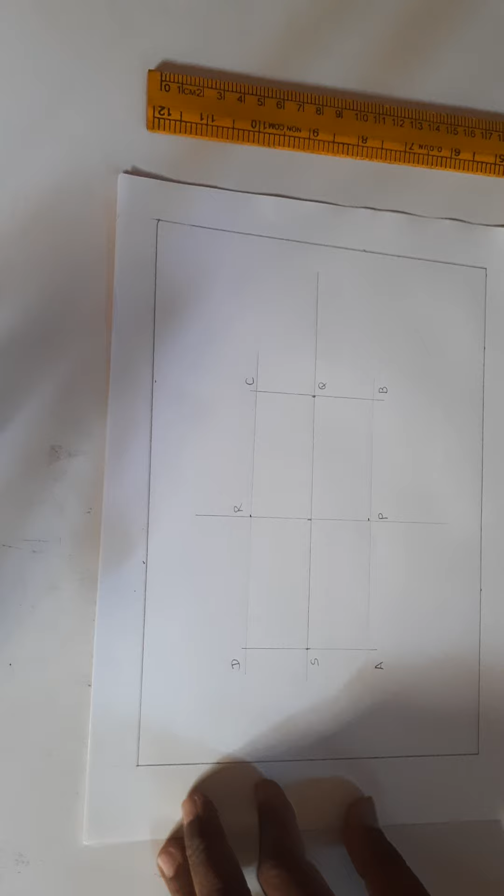Okay, girls. Now we are making this rectangle as ABCD. So I am marking this as A, B, C, and D. The midpoints as P, Q, R, S. Fine, girls.

Now mark on DS at 1 centimeter apart, because we are dividing into 3 equal parts. Similarly AS also 3 parts. This center one I will take as O. Similarly CQ also we are dividing at 1 centimeter apart, and QB also 1 centimeter apart.

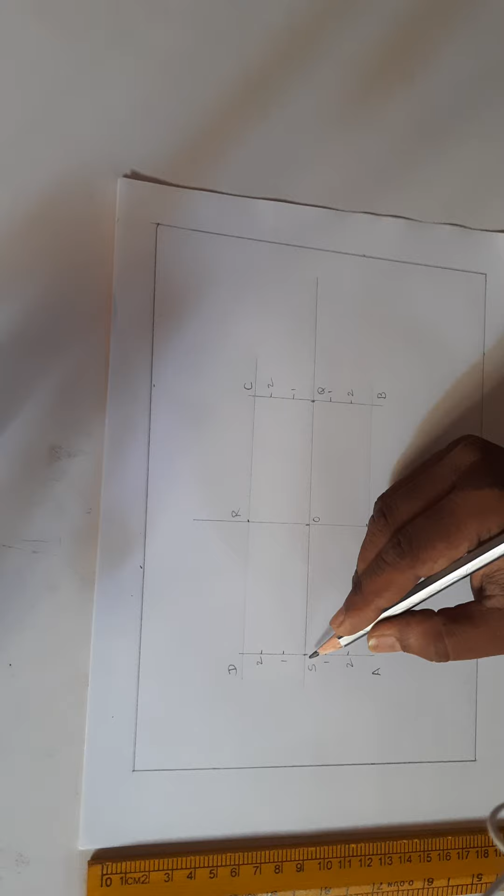Now always from the center we have to number as 1, 2, 3. So from here I am marking 1, 2, and here also 1, 2. From the center we are going outward. Similarly from S we have to mark SO as 3 equal parts. It is 6 centimeters, so we mark 2 centimeters apart.

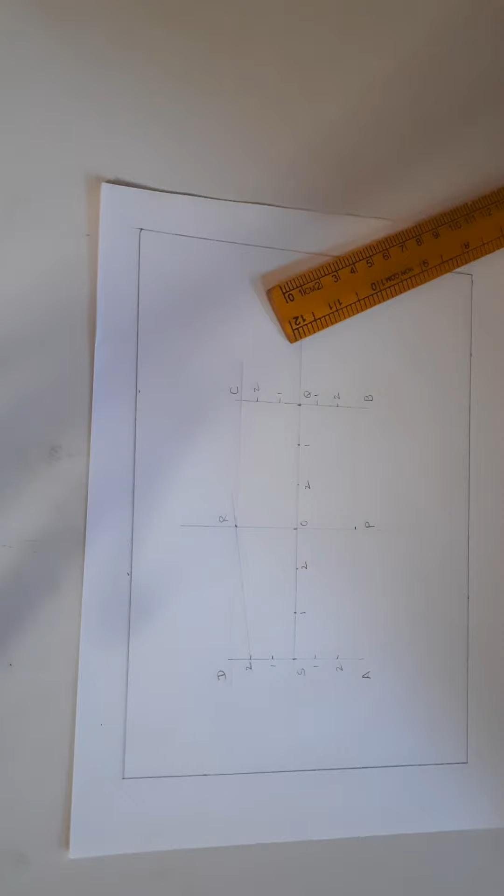So the first quadrant we are taking, draw a thin line passing through 1 and R. Similarly 2 R also we are making a line. So the left quadrant we are making. Now from P you have to join 2 and extend it till it intersects the R2 line, up to here.

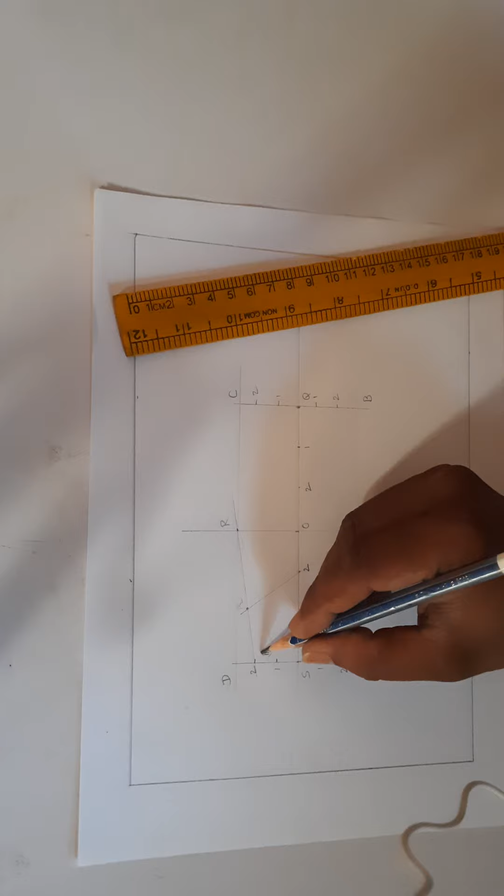Mark this as point P2. Similarly join P1 and extend it till it intersects the R1 line. So mark it as P1 and this as P2.

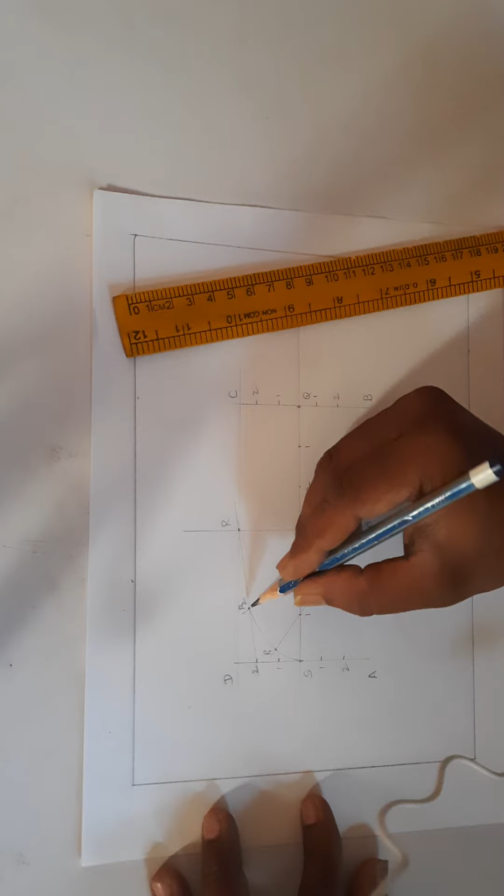Now we have to draw the first quadrant arc from S passing through P1, P2 and R. Join with a thin free hand line. Now P2 to R; it is a lengthy line, so take care that it comes like a tangent towards R. First draw thin with H pencil, then highlight with HB pencil. This is the first quadrant of the ellipse.

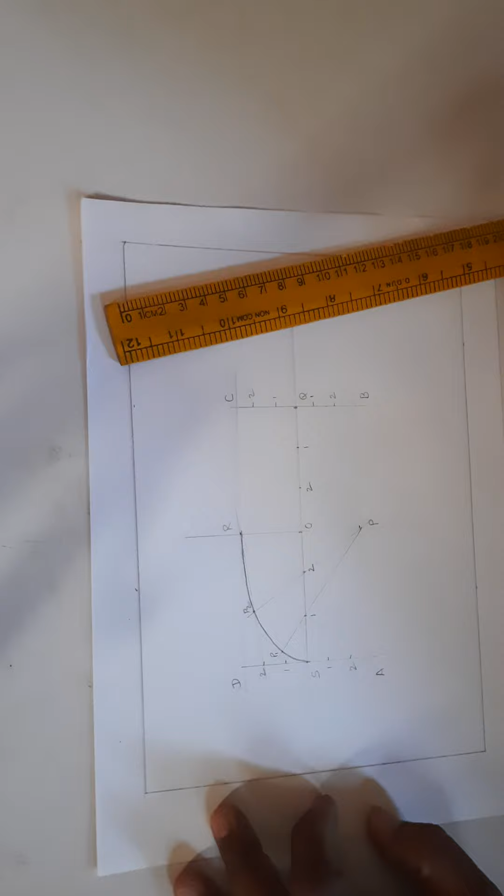Now the same pattern we have to draw on the right side. So we join R and 1 with a line, and R2 we are drawing a line.

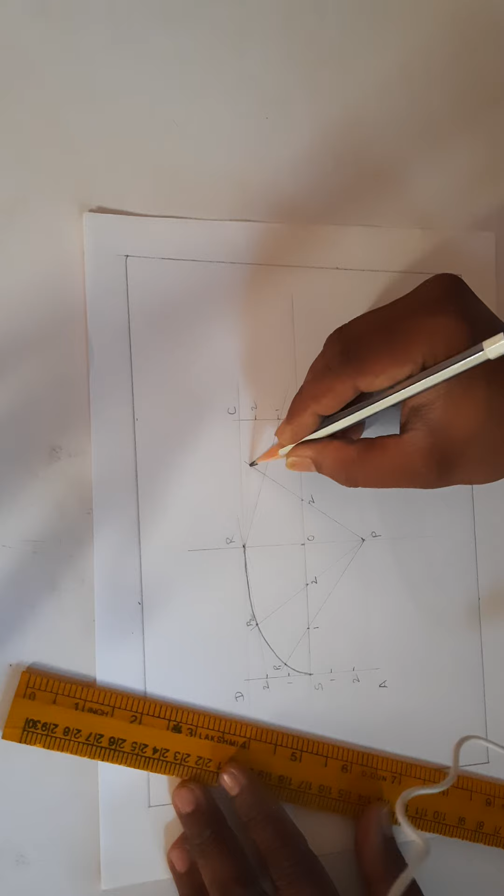Now the same pattern: from P we have to draw the line P2 and extend it till it is intersecting the R2 line on the right side. So P and 2, we are drawing a line and extending it till it is intersecting this R2; now mark this as P3. Now from P1, extend till it is intersecting R1 itself. So again we have to draw the line. So now P3, and this will become P4.

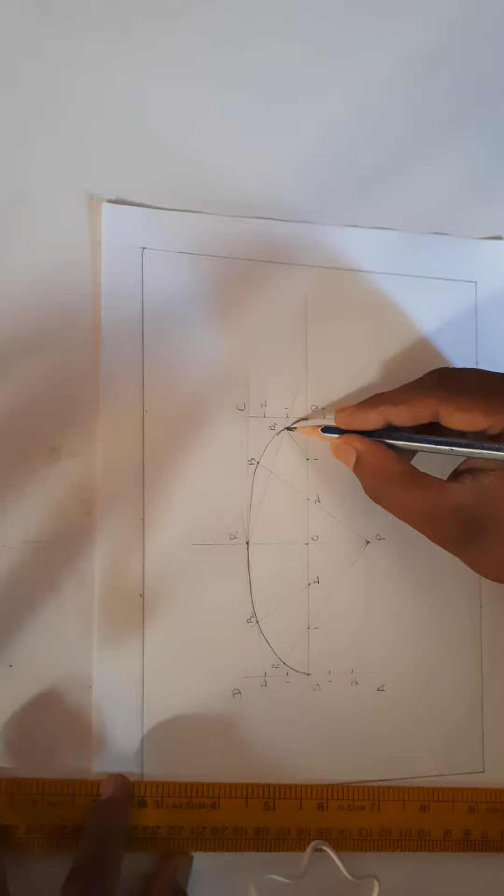Now draw the line joining R and P3. The same curving we have to get: P3, P4, and P4 to Q like a tangent continuation line. So we are going to get it. So now this is the ellipse right side top, we got it.

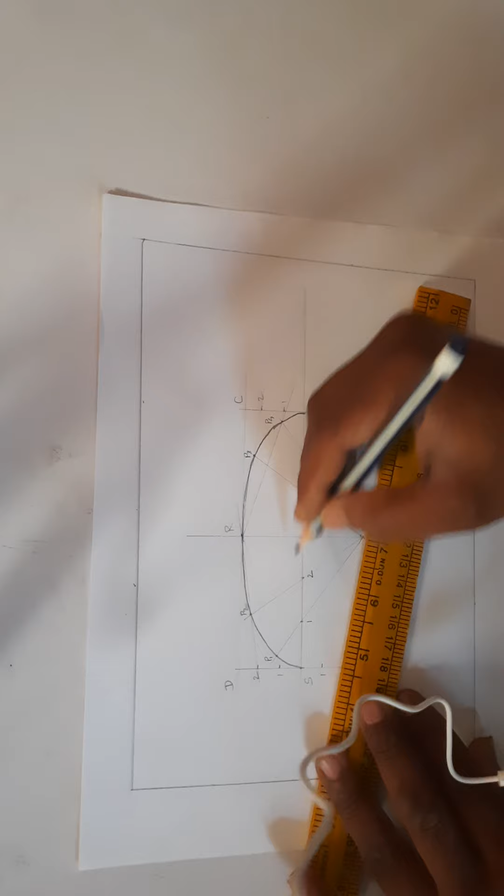Now the bottom one we have to draw in the same pattern: from P2, P1 on this AS line we have to draw the lines, similar to how we drew from R2 and R1. The same pattern we have to get. So now we are joining, continuing this process. Now we are going from the right side. So this P1 and this P2 on the BQ line we are getting.

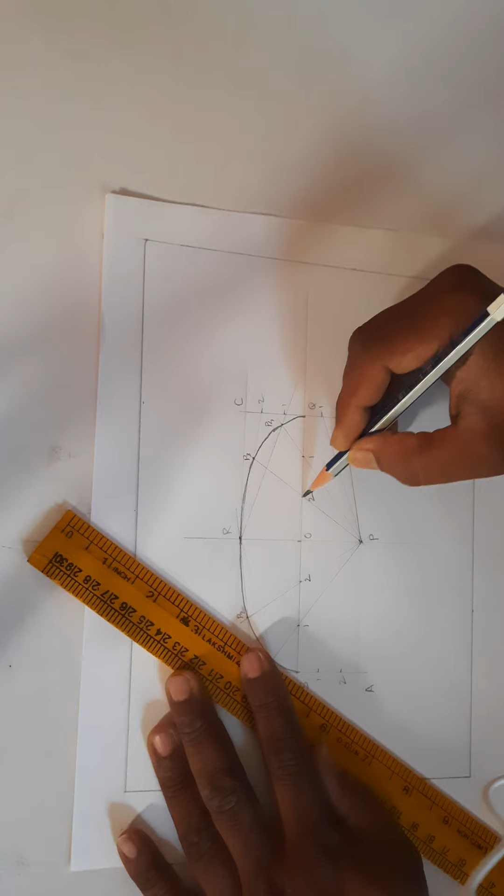Now we have to draw the lines from R2 and extend till it is intersecting this P2 line. So 2 and R we are joining and extending till it is intersecting. After P4 it will be P5, so this will become P6. So I am writing it as P6. Now R1 we are joining and extending till it is intersecting here. So this is P5.

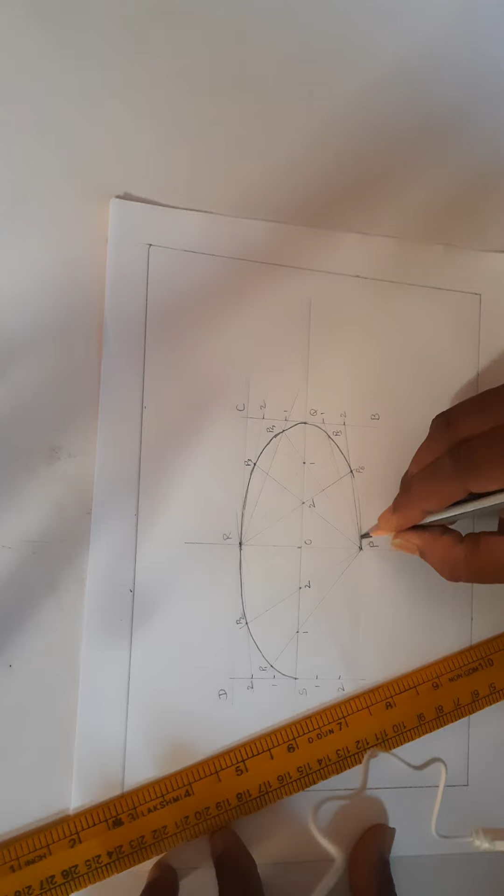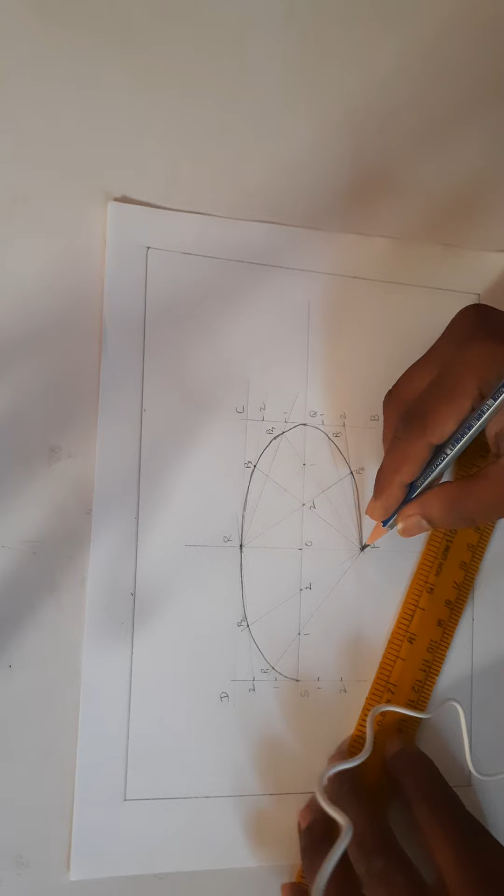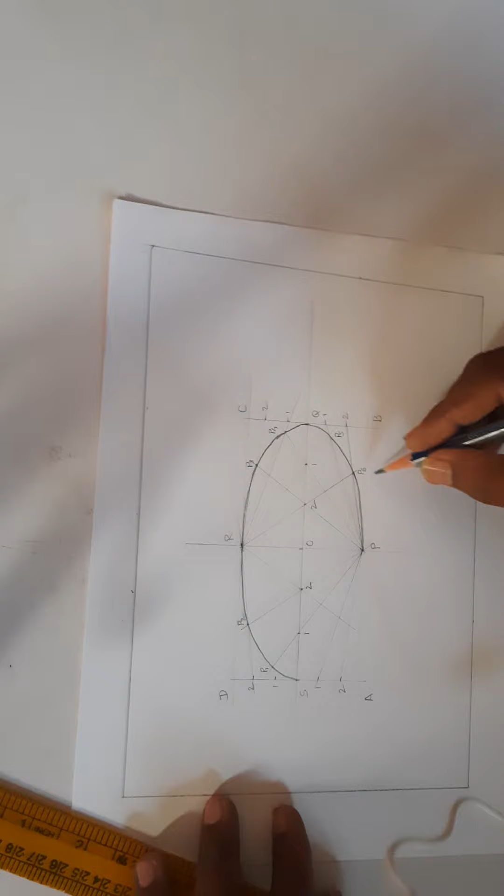Similarly, we have to draw from here the P2 and P1 lines on AS. Okay. Now we have to draw R2 and extend till it is intersecting the P2 line here. So draw the line from R and 2, we have to extend. After P6 this will become P7, and R1 we extend till it is intersecting the P1 line at P8.

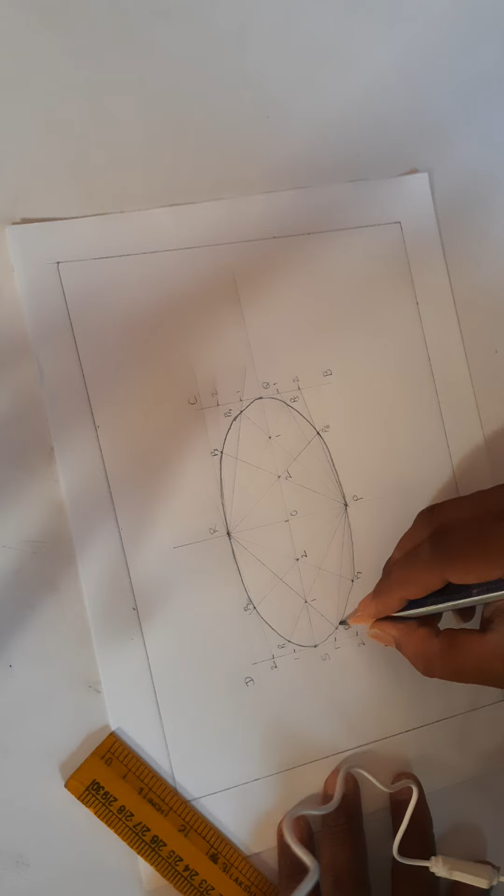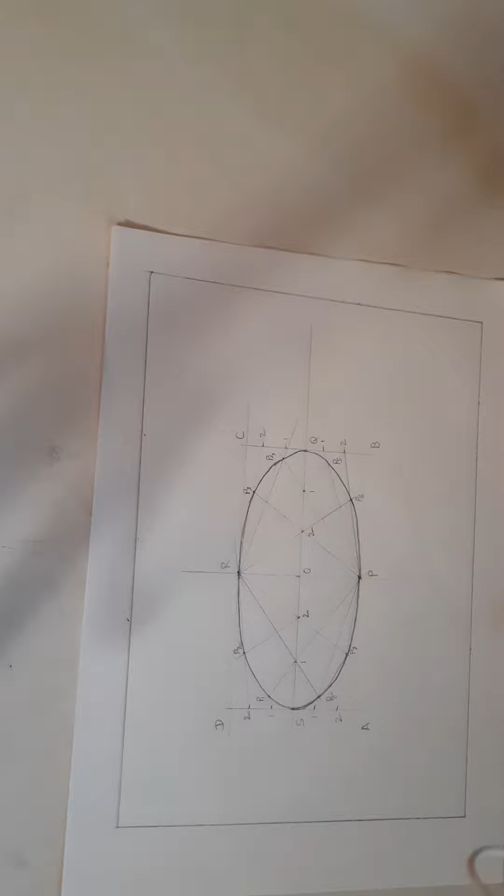Now we have to join P6, P7, and P7 to P, but it should not come as a shivering line; it should come as a continuous tangential line. So this is our required ellipse. Erase whatever unwanted thin lines remain. So this is the ellipse, drawn using the rectangle method. So try to follow. You can replay the video and practice. This is one of the techniques.

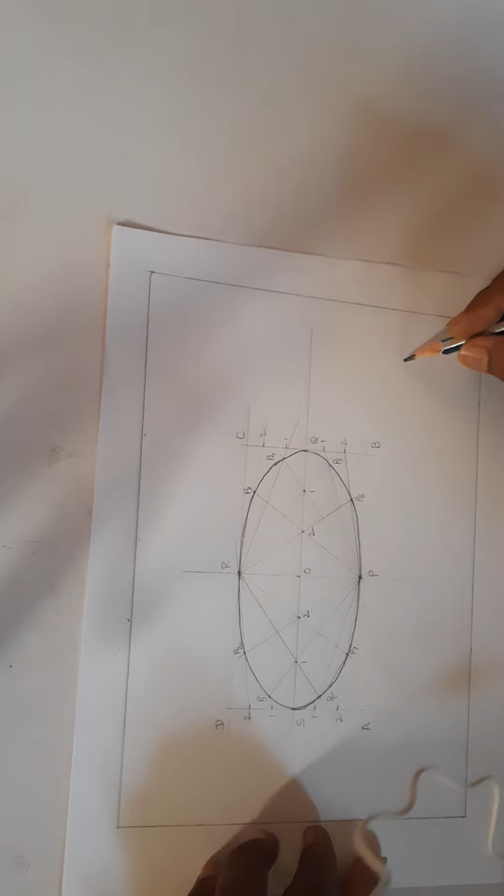This is ellipse 1. With 1 centimeter height lettering you can write it in the title box of 15 centimeters. This box you can take a little bit higher. You can write ellipse 1 in the 15 centimeter title box. Here we are drawing the title box, 15 centimeter length. If you are drawing only a small 10 centimeter box, you can also write ellipse 1, no problem, but from now onwards take a 15 centimeter length title box.

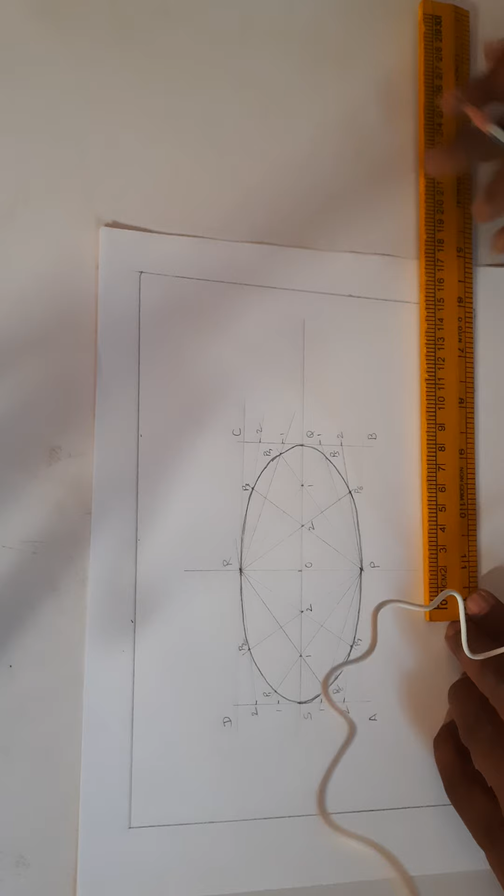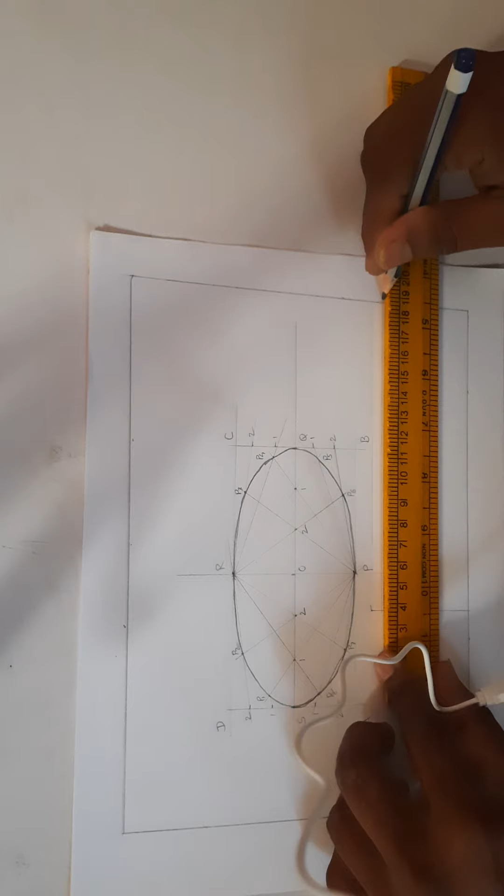So from here we take 15 centimeters, getting up to here, and 5 centimeter height. So you can get the title box here. It is somewhat interfering with the diagram. Leave 5 millimeters as space. Next 1 centimeter is the height. Next 5 millimeters. Next 1 centimeter.

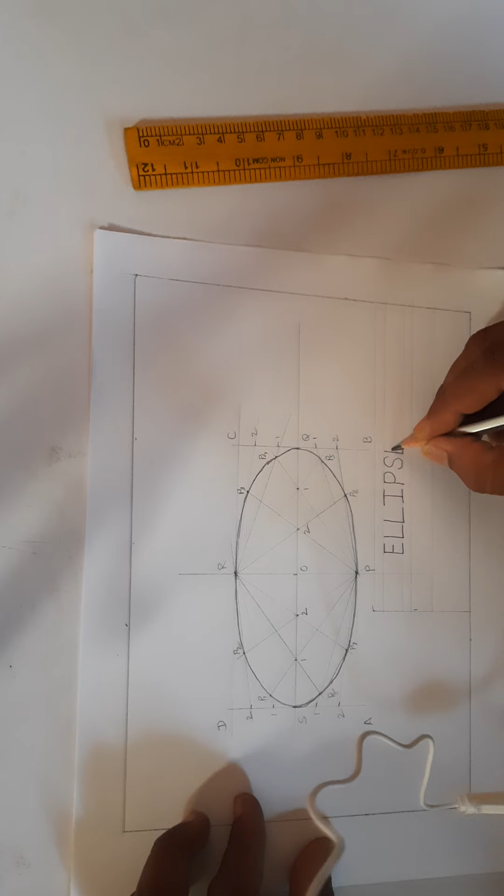Now here you can write ellipse. You can write it centered or on the left side. E, L, L, I, P, S, E: ellipse, and this is the first method, so we are writing it as 1. This should be a straight line, not slanted.

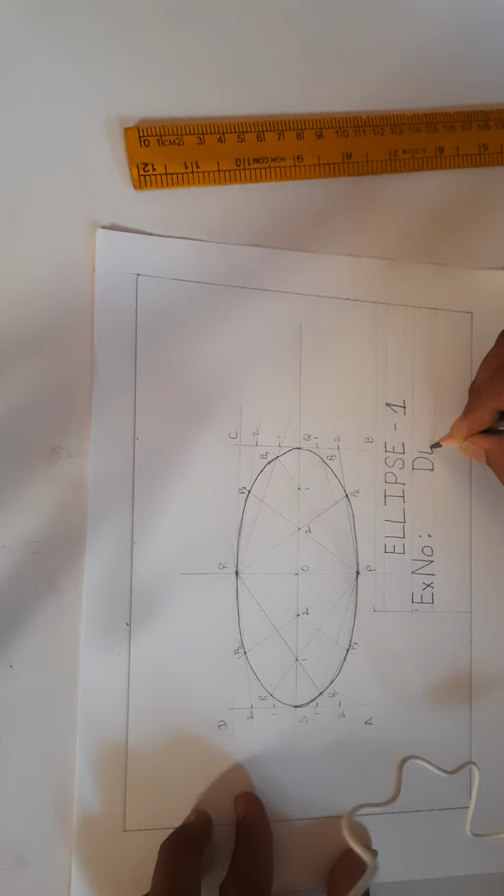Here you can write the exercise number, EX number, the continuing diagram number, and today's date. I will give the dates, so follow those dates. So like this you have to write the ellipse. This is the first method of ellipse.